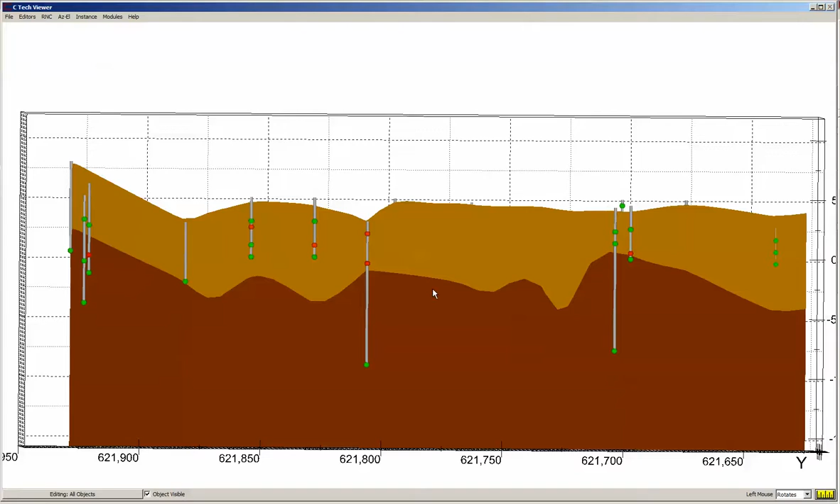So the first time I did this, the first thing we came up with, it looked like this. And quickly, what we realized is that, because this thing went straight down the middle, you can see that planimetrically in 3D, depending on which perspective, we can either see all of these samples on one side of the line or not. Okay, so that's that. Let me go ahead and put this back.

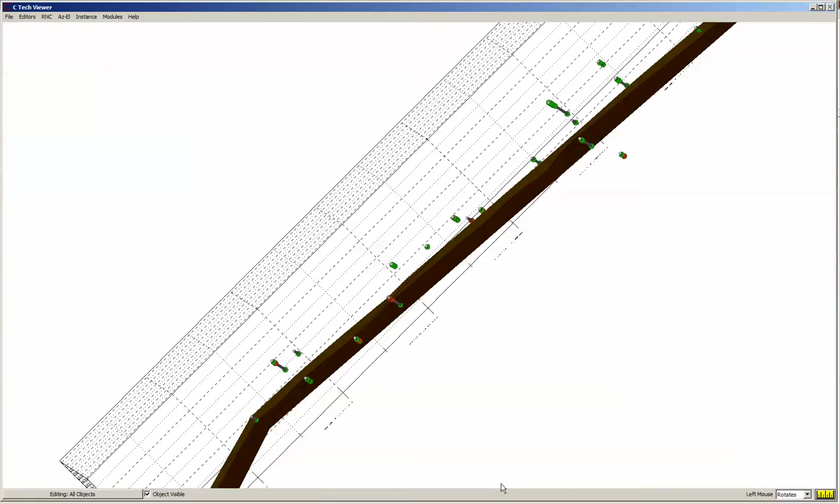Okay, so then our next possible solution was, what if we didn't do it like that? What if we moved the line back? Let's just push that line back and then we look at everything in front of this cutting plane. And so that's what this looks like when we do that. Instead of this transect right here, we've just pushed it back a little bit so that we can see

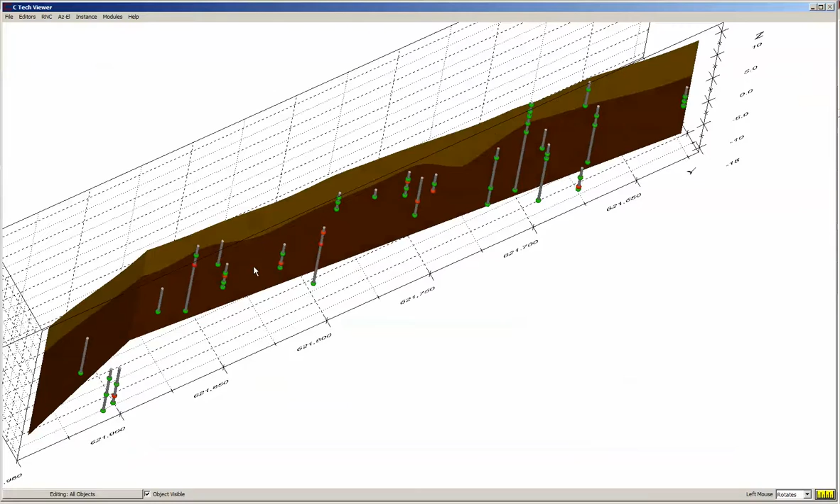our soil borings. We had another brief discussion, and one of the things that was evident then is that that's really kind of a problem because this isn't a static flat separation between the fill and native layers, and how do we know where the soil borings and the detections, or exceedances rather, are intersecting which layer?

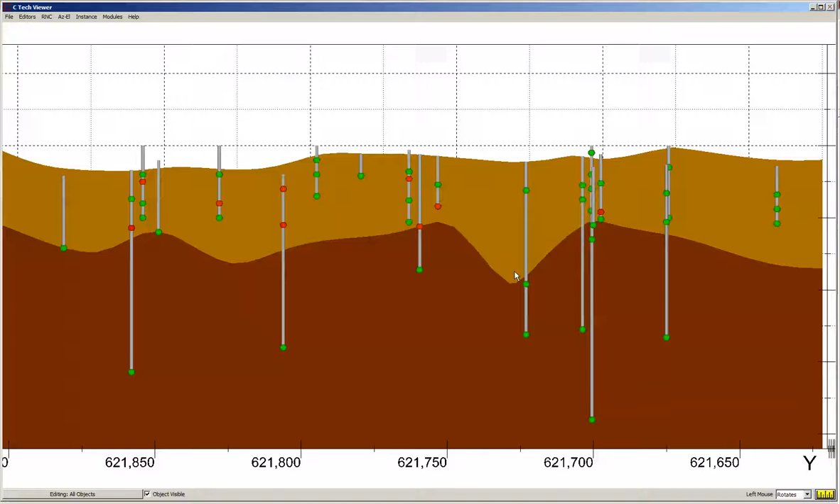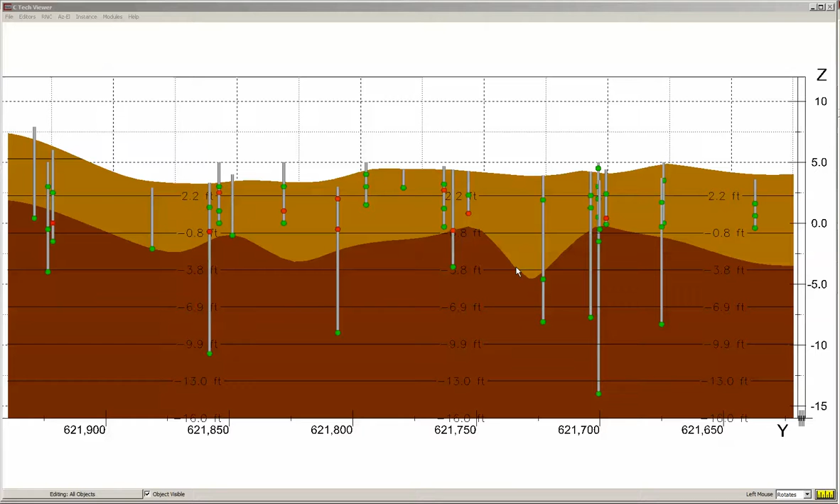So okay, that's fine, and maybe one way to tackle it is to provide ISO lines across the face of it. And when we do that, instead of relying simply on this grid, our labels on our elevation plane, we're actually projecting the actual elevation data onto this cutting plane, and that gives us a better picture. So that's maybe one way to address it, but it still doesn't address the foreground effect.

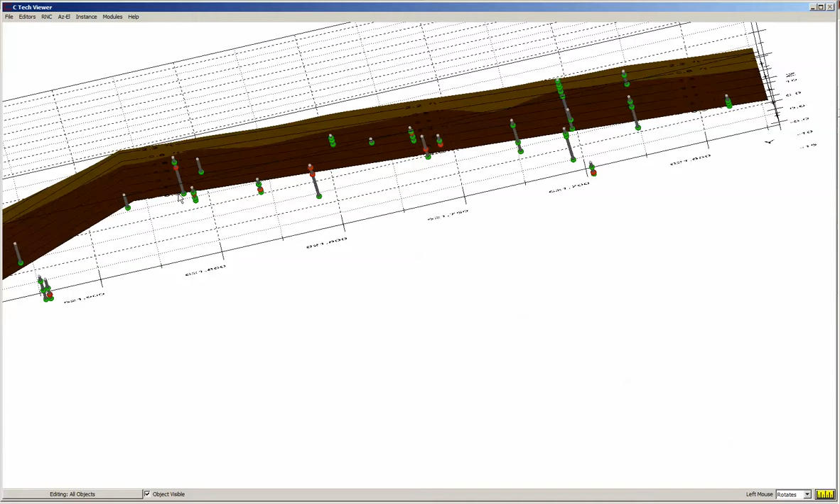The reader can kind of see what's going on, but you still have this whole issue right here where some of these samples are as much as 40 feet ahead of this surface. So because we are really interested in the exact intersection of the soil borings and our lithology, it was suggested that we actually digitize the cutting plane through every single point so we know that there's a contact point. At first I thought, well, yeah, this is a great idea, but you can quickly see how this is going to shake out from here.

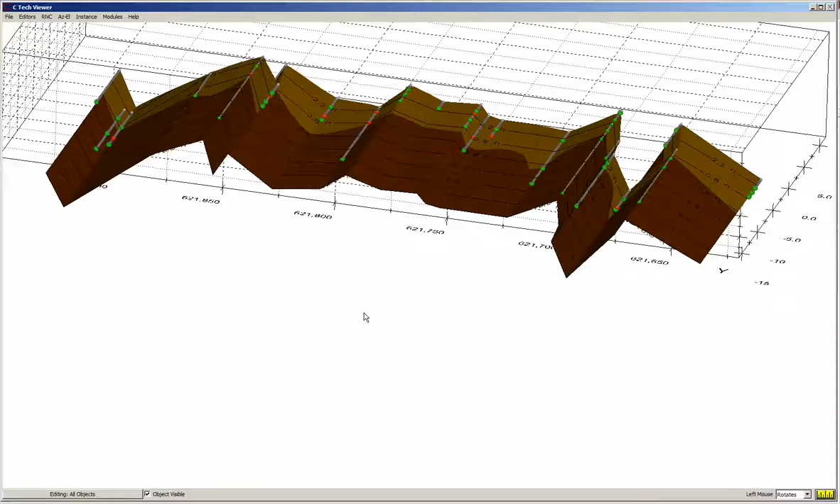So if we do this like this, it gets pretty hairy pretty quickly, and it's also going to be a big problem when we get to BB prime, because then what does this line look like? If you try to connect the dots here, kind of crazy, but no worries. We went ahead and tried this anyway. And when we do it, you can see that we get this sort of accordion effect. Now we have in fact gone through every boring, but right here it's kind of a mess. I don't think this is really what we intend to do here.

It's also worth noting that while it is possible to do a true fence diagram with something like this and straighten it out two-dimensionally, you cannot do it with the soil borings. They will not automatically adjust to correspond with a two-dimensional fence. It's a limit of the software that I've run up against. I've looked at this, and it's explicitly stated, in bright red, that that's not really something that you can do very well. Not something that you can do, period.

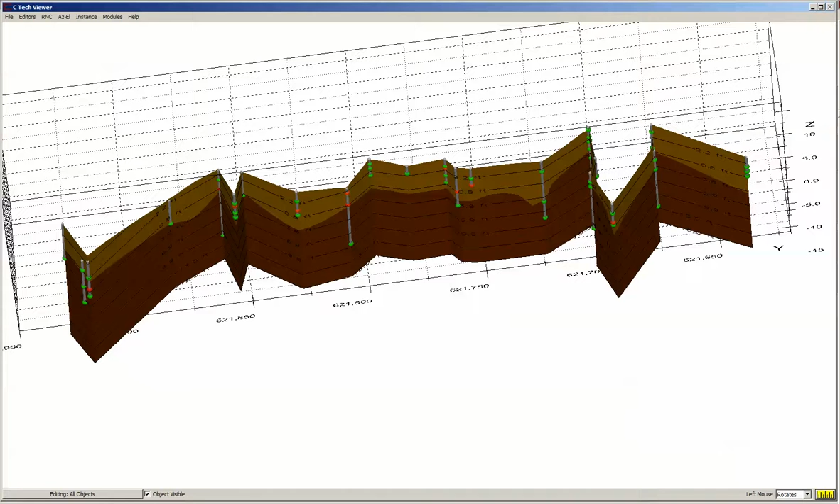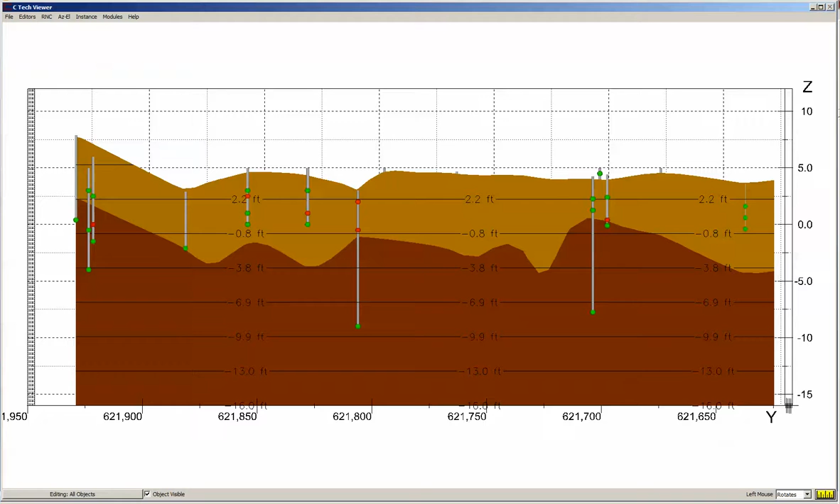Okay, so where does that leave us? So I came back to this idea of using our original delineation of our A prime cutting plane, and then we can maybe call back the transparency here on this, something like this, and then we can still see what's in front and what's behind.

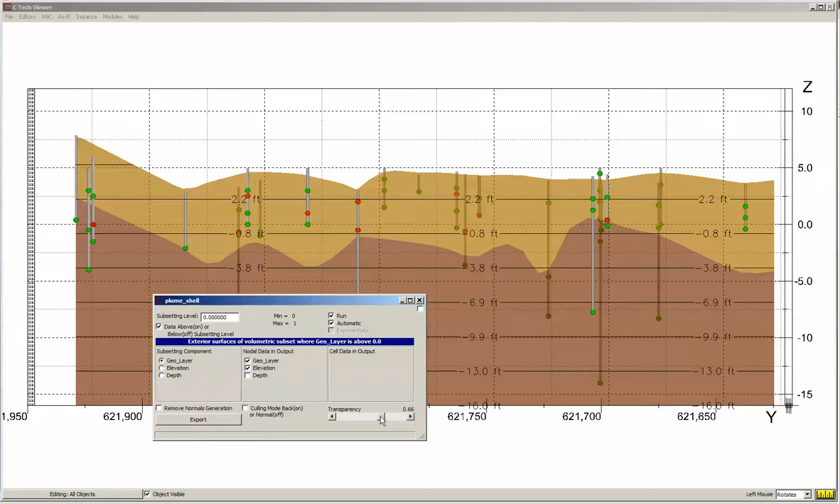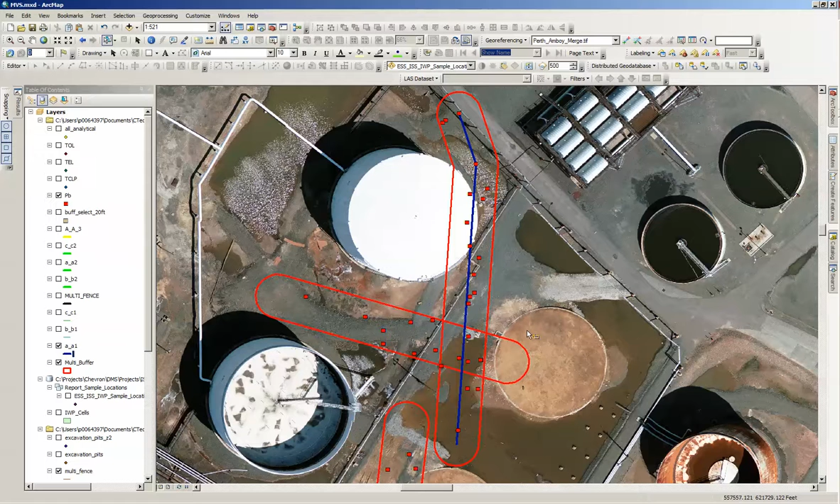I don't know if this is going to be confusing to our reader or viewer. Maybe we play with some sort of transparency effect here, so they can get at that, and then we can see exactly where these lines are. That way you're not 40 feet away from any given point. You're sort of splitting the difference.

And then we can play with some other visualization things, like maybe what we do to make this a little bit more readable is to take off minor and also major axes lines, and then you really just have the elevation of the strata projected onto this cutting planar surface.

So just a thought, but this is a discussion that maybe we should have once the project team has had a chance to mull this over. So that's kind of where it's at. So we'll talk about it.